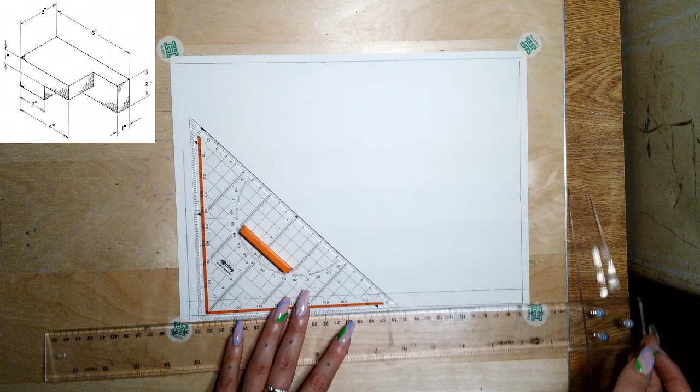All right, let's just lay out my title block. 4, 3, 2, 1.5. All right, what's my time? Did I beat the world record? Am I the queen of title blocks? Maybe.

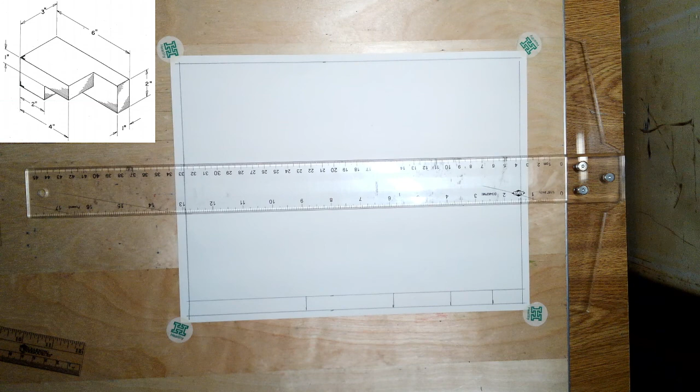All right, I'm going to start my front view. Just like always, I pick a place in the bottom left corner off of the border's edge to start, and I'll put a guideline out and a guideline up. Went a little further than I typically do, but that's fine. Sometimes I mix my two little techniques together.

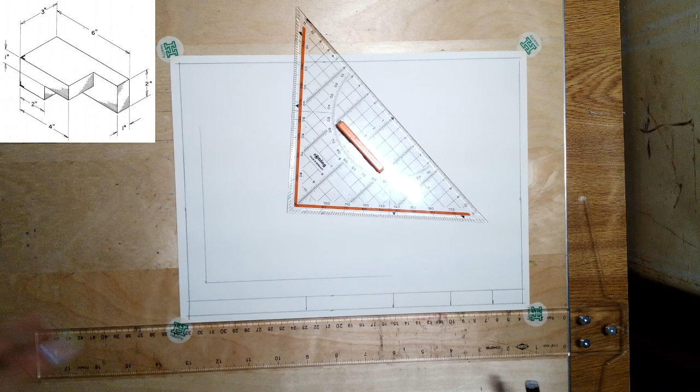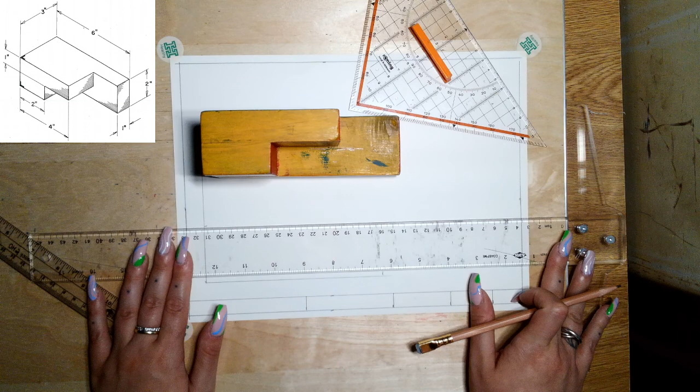So now I'm doing my front view, and I'm going to start with the overall length. I have an overall length of 6, and an overall height of 2. So I'm just going to make an overall bounding box of the shape, and then carve out the different features that are in the front.

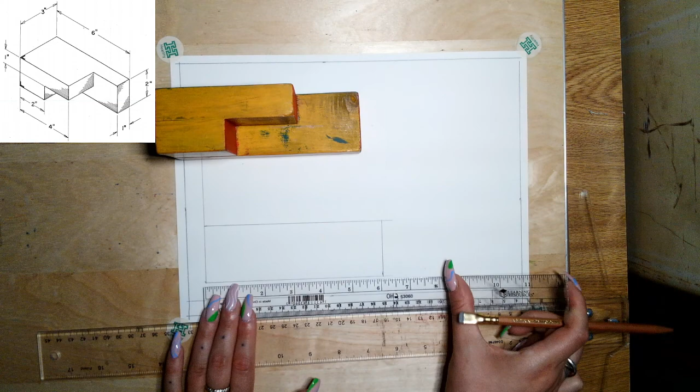So looking at the front view, I can see in the drawing that I've got that little ledge right here that goes up 1 inch. So I'm going to measure over 2. I could even do it this way where I go over 2, make a reference line, and then I know it goes up 1, which I eyeballed perfectly.

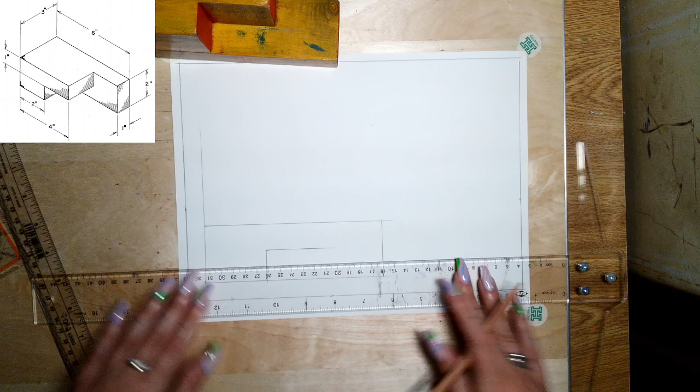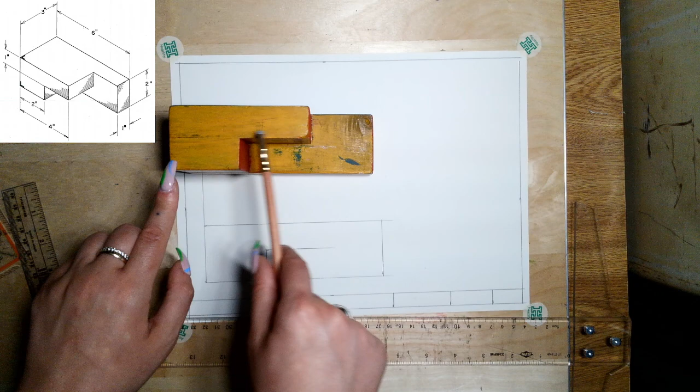Wow, I'm a marvel. And I'll go across, and I can see this also goes across another 2, because I have to do some math there. It tells me that this is 2, and from here to here is 4, so I have to do some math that this would have to be 2, because 4 minus 2 is 2.

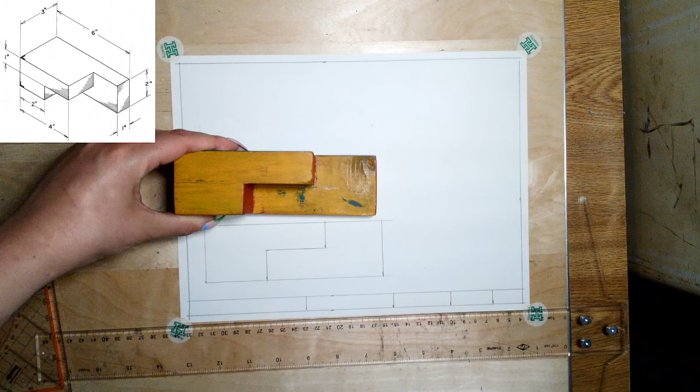Measure out 2. And then it goes up another 1 inch. And then I have my front view of these two little nestled together pairs.

So now onto my top view, in which I'll pick a place to start it. It's a little too far up. So that'll be my starting point.

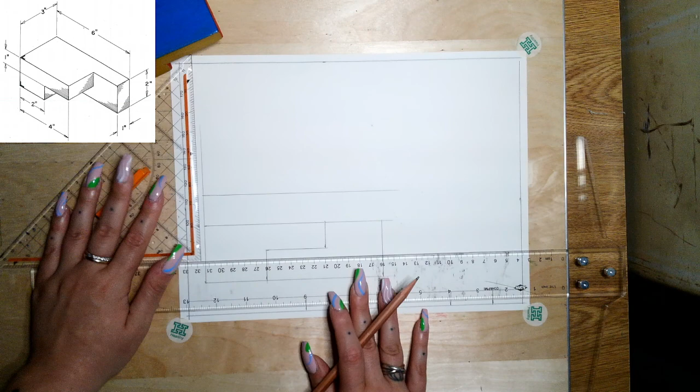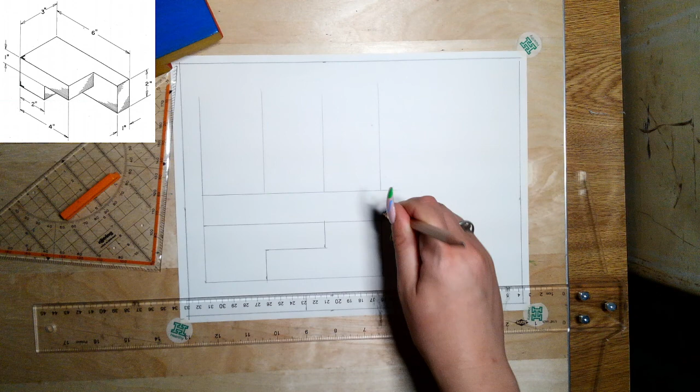And then I'm just going to project anywhere I have a vertical feature in my top view or my front view, I'll project it up. That means it has to be referenced, whether it's a hidden line or a solid visible line. If it exists in the front view, it has to exist in the top view, because things don't disappear or vanish, they just get hidden out of our sight.

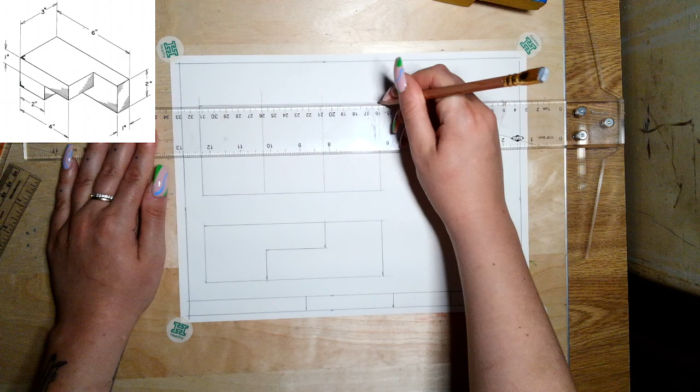So now in our top view, we need to figure out our overall depth of the object. Our overall depth is 3. So I'm just going to measure 3, make a mark, draw a line across. I'll clean up these guides while I'm at it.

Before I start tackling things that might be hidden, I'll make this little ledge here, which goes 1 inch down. I have to do some math since it doesn't tell me straightforward. It doesn't say how much this is, but it tells me the whole length edge to edge is 6, and from here to here is 4. So if this is 6 and this is 4, I know this is 2, and I have it referenced right there.

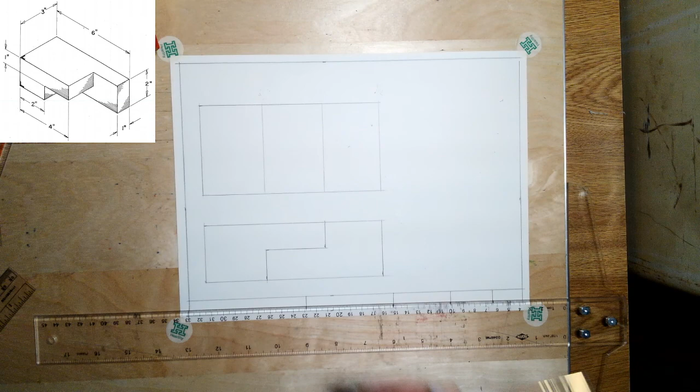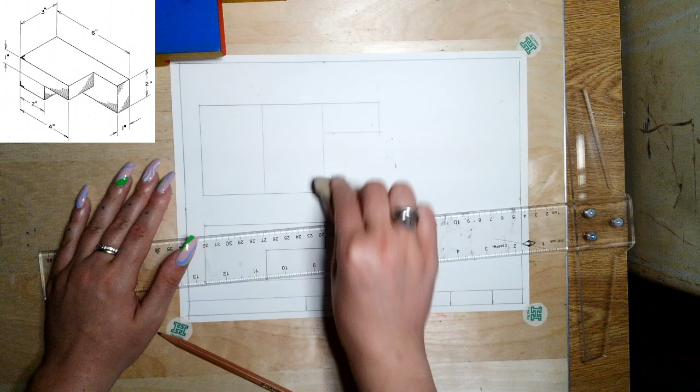So I'm just going to measure 1 inch and bring that line in. Now these guides are going to get erased because there is no part of the object that's there. That just helps me put my guidelines up for reference points.

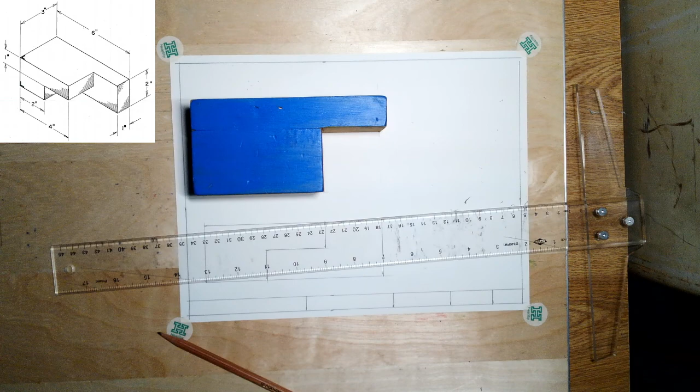Now I have this line here, but that is referencing this little ledge and edge underneath it that I can't see when looking at the top. So when we can't see something in a view, it gets drawn with a hidden line. We have that hidden line going back there. If I flip this object over, it's easier to understand it doesn't go all the way through — it stops right here on this face, so it only goes in 2 inches.

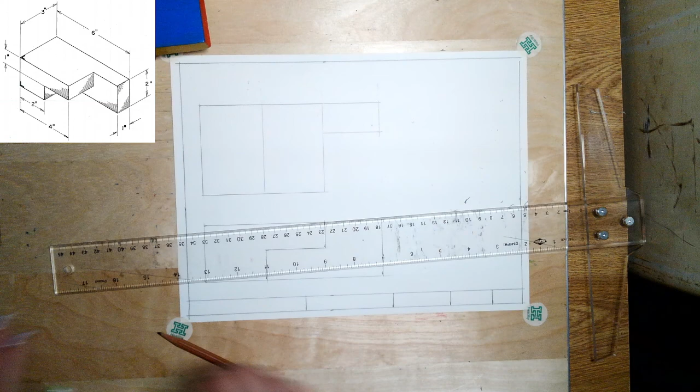So I need to bring this over to meet, to finish up that hidden line. I'll just bring that over, get rid of some of these guidelines I no longer need, and grab my erasing shield. I'm going to turn this line into a hidden one.

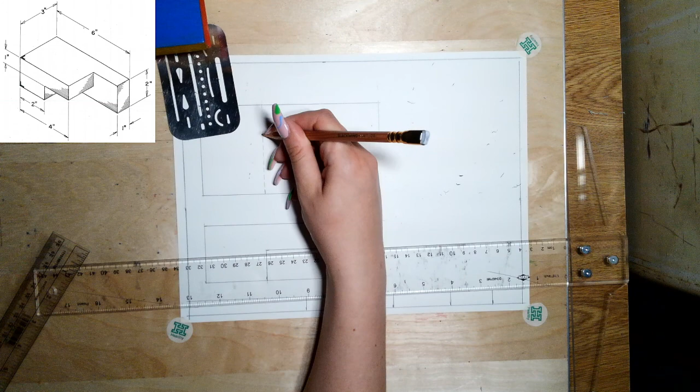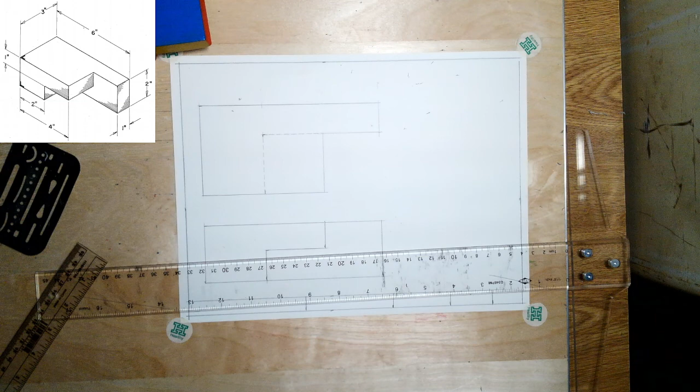Sometimes this leads to those lines being a little bit longer than the typical 1/8 of an inch, and that's okay. You just want to make sure they meet, that there's not some weird awkward gap. Same thing — I want a line there meeting at the edge of this object, a line here meeting at the edge, and if they cross, that they also meet with no awkward gap.

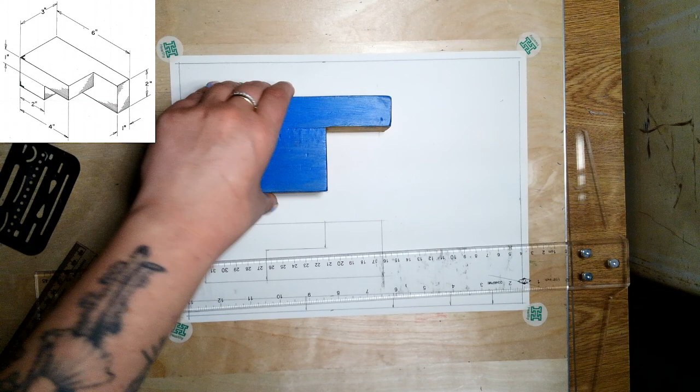Now I have my top view done, and I'm ready to work on my side view. So I'm going to do my miter line technique from where the top and right lines meet, a 45-degree guideline, and then just reference where these lines would touch it.

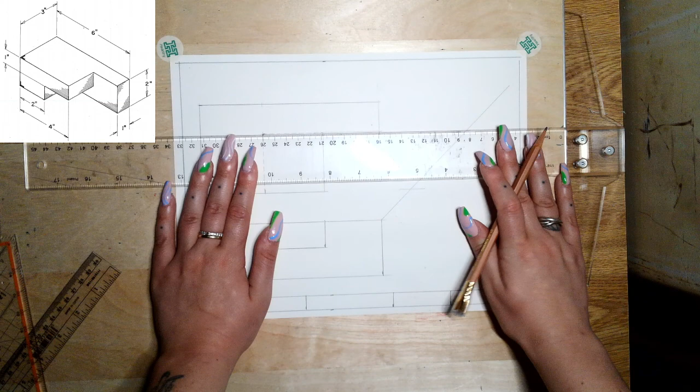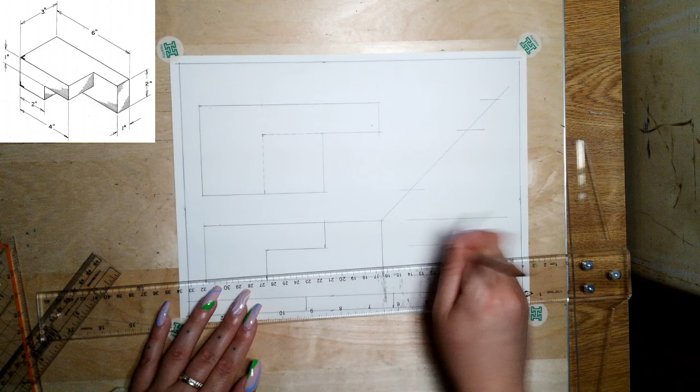And then let's bring these guides out while I'm here. I feel like I did that one a little bit off. Yeah, I did — I feel like I did that one a little bit off too. Still seems a little too big, but it's okay.

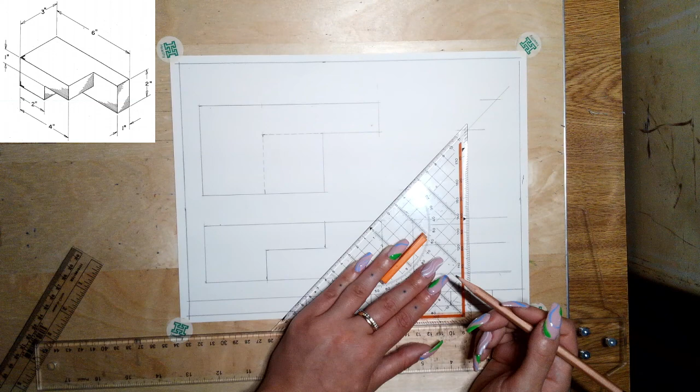And then I'll project these straight down. So where it would meet, project down, where it meets, project down, and where it meets, project down.

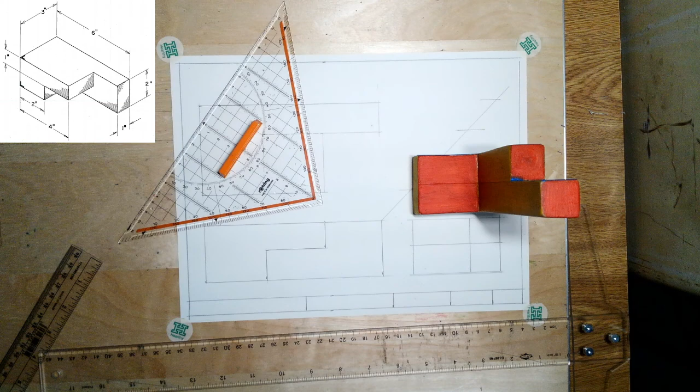Now for my side view, this looks a little bit like the one we worked on before, but almost as if these features were flipped. In that case, we had face, face, because that little notch went back here. In this one, this is all just one piece — the difference is this is now split into two different faces.

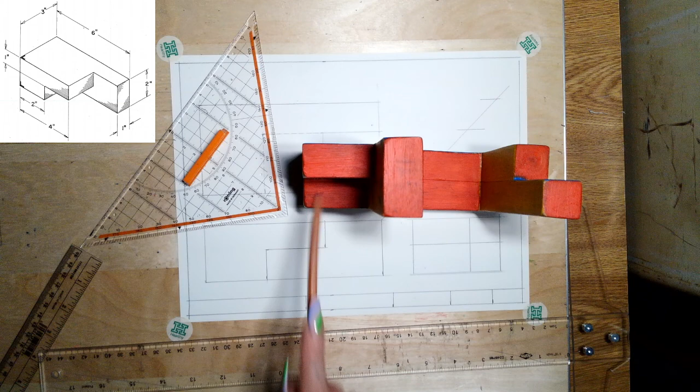So for this one, the side view would not have that line there. Maybe you picked up on it and just didn't put the guide all the way through, or maybe you've just been drawing your guides all over and can already visualize your faces. Get rid of my miter line, and I've got this shape ready to go.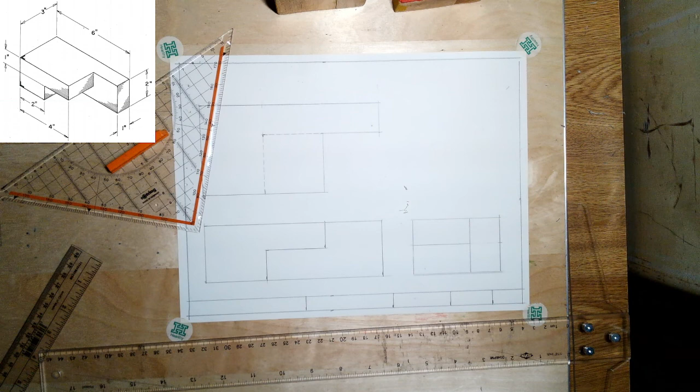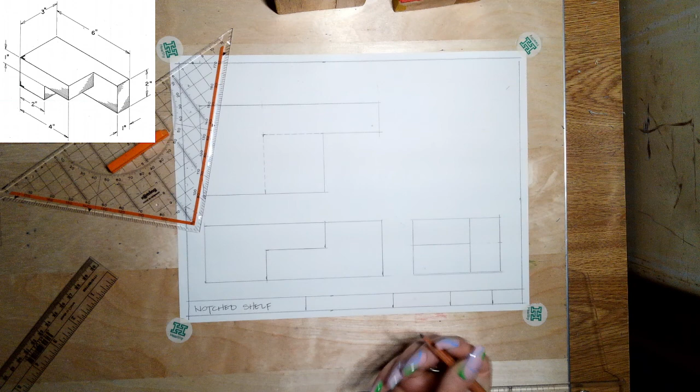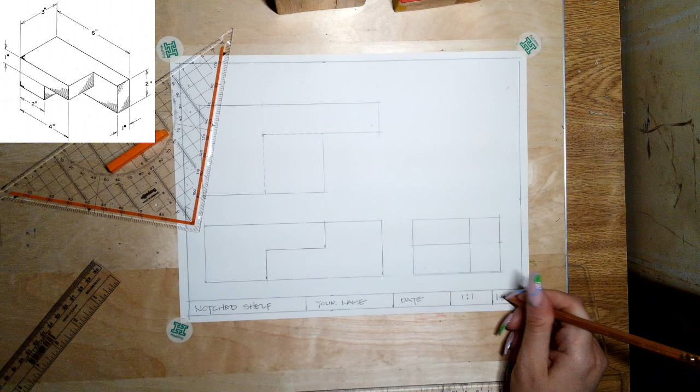This one is called the notched shelf. Again, in the title block, make sure we're lettering neat in all caps: the notched shelf. Then in the next box, you'll put your own name, the date you drew this, and the scale, which in this case is 1:1 — 1 inch on paper is 1 inch in real life. And how many drawings are in the set for this notched shelf: this is drawing number 1 of 1.